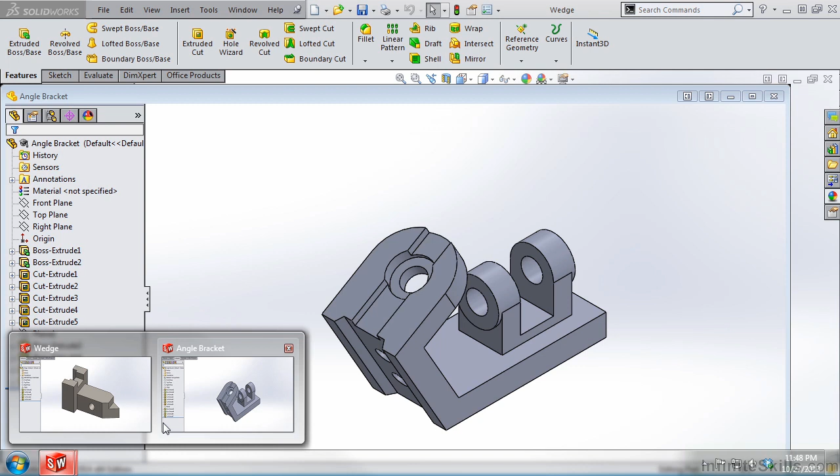In this lesson, I am going to show you how to measure existing features on a part. To demonstrate this, we are going to use two different part files. The first part file, the one you see on your screen, is called wedge, and the second part file is called angle bracket, and both of these can be found in your working files folder.

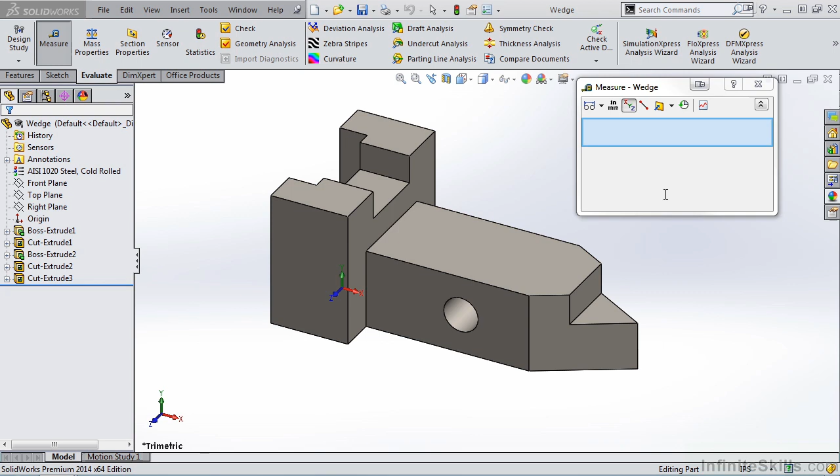So let's begin. We'll start by selecting the Evaluate tab, and then selecting the Measure icon. As soon as we select the Measure icon, a dialog box appears. Now the Measure tool will measure a distance, angle, radius, and diameter. It will also measure the distance between points, lines, surfaces, and planes in sketches, 3D models, assemblies, and drawings. So this Measure tool is very versatile.

So let's begin. I am going to select a vertex on this part. When I select a vertex, in the dialog box, I receive the XYZ coordinates. I also receive a flag on the part file displaying the same information. Now to clear this window, I can either right mouse click and select Clear Selections, or simply click outside of the dialog box. Now I'm going to select an edge.

When I select an edge, the Measure tool tells me the length of the edge is 2.37 inches. If I select a second edge, it tells me the two edges are parallel. The normal distance between them is 1.4 inches. It also gives me the delta XYZ values along with the total length of both edges.

Let's clear the window again, and this time select a face. The feedback I receive from selecting a face is the area and perimeter of the face. Now if I select the face and an edge, I receive the feedback that the two items are parallel. The normal distance between them is 1.12 inches, and I also receive the delta XYZ values.

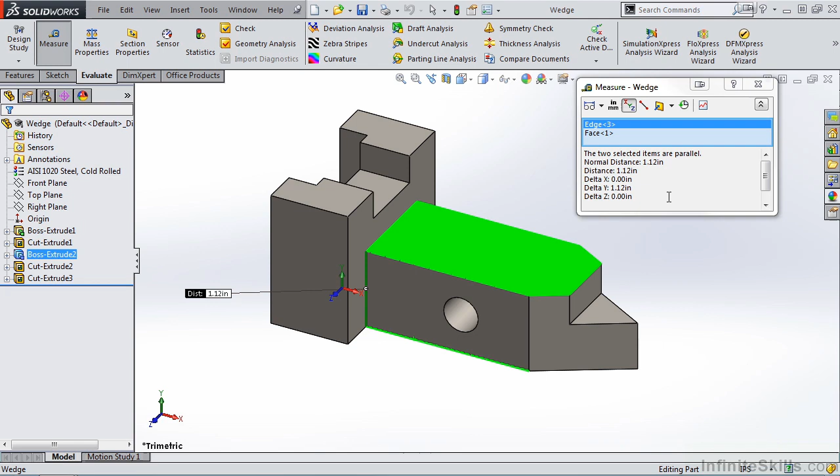This time, I'll select the two angled faces, and it tells me the angle is 60 degrees. Next, I'll select the hole in the part, and it gives me the area, perimeter, and diameter. Notice in the dialog box, I also have the option to measure a point-to-point distance. So if I select point-to-point, select this point here, and this point on the opposite side, it tells me the distance is 2.75 inches. And once again, I have the delta XYZ values.

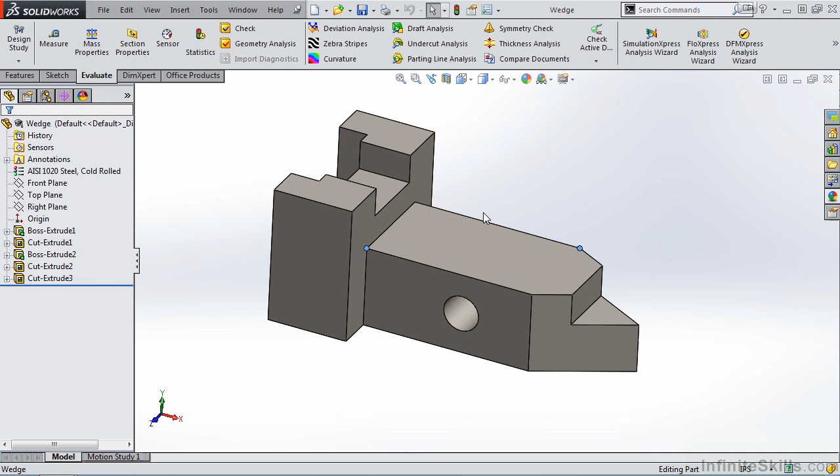I'm going to go ahead and unselect this, close out of the Measure tool, and now let's change part files to the angle bracket. I'm going to go to the Evaluate tab and select the Measure tool. This time I am going to roll the model, and notice I have a drop-down list here for measuring arcs and circles. I can measure a center-to-center distance, a minimum distance, maximum distance, or a custom distance.

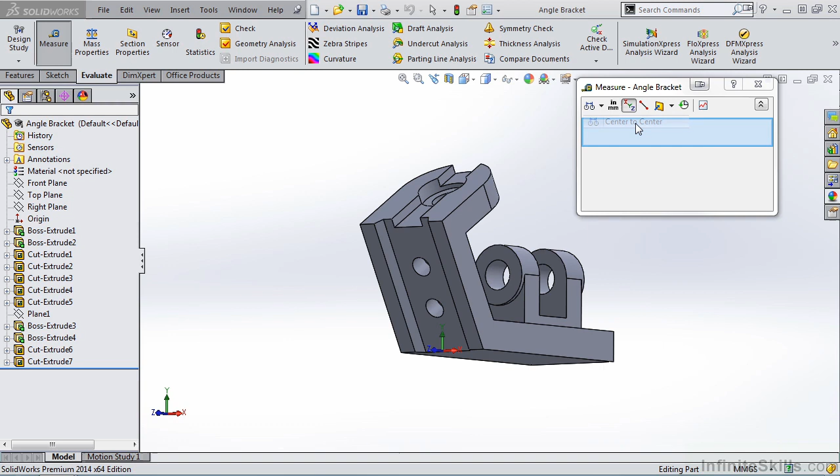I am going to select center to center and then select the two features. And the center to center distance is 29 millimeters. Now, I can change to minimum distance by selecting the drop-down list, or I can select the flag on the screen or make the change in the drop-down flag. So in closing, you see this Measure tool is very versatile, and it's used on a regular basis by all SOLIDWORKS users.